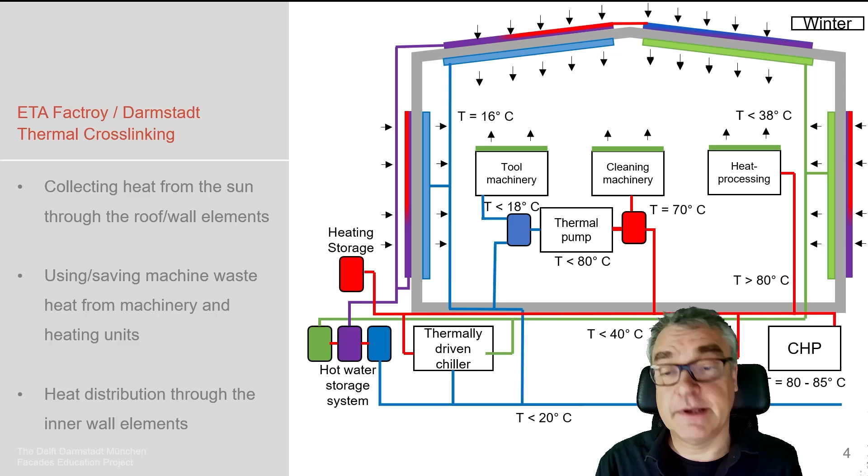Then using this energy and the waste energy from the machines, that whole thing is stored and then delivered to the inside in the case of need. And in summer, it works vice versa, which I like very much.

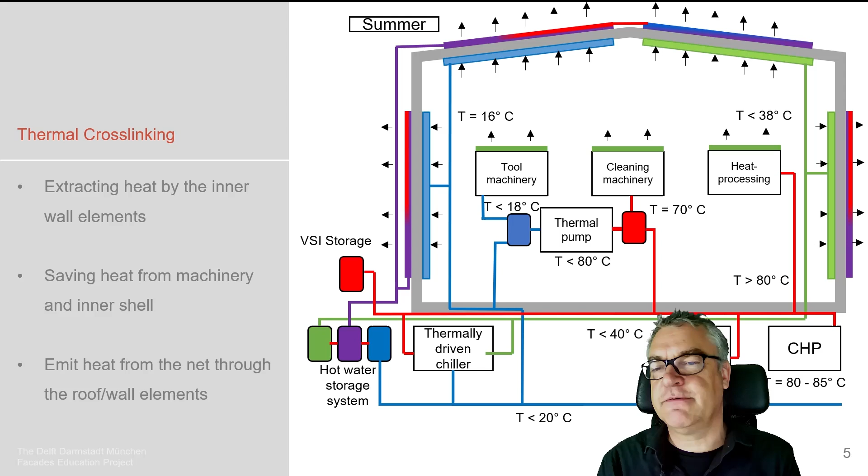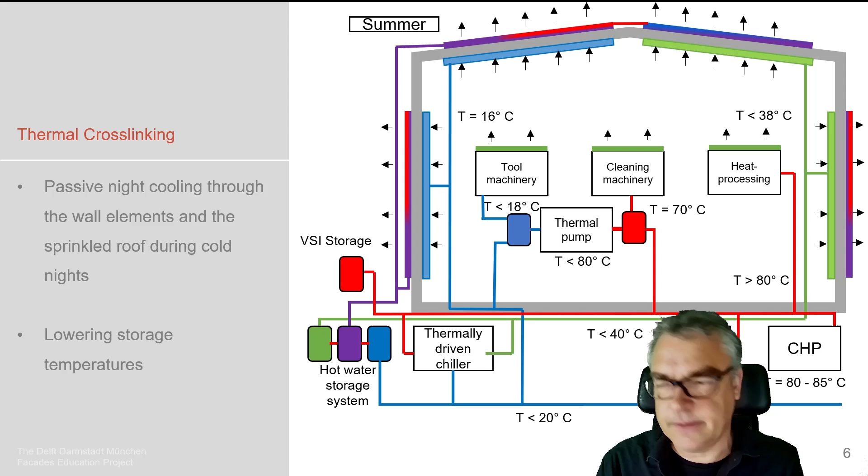So we have the energy from the machines at the inside, which is then absorbed by these collectors in the facade, then stored and then delivered at night to the outside to reduce the heat in the facade. So it actually cools and heats depending on the time of the year. This is how it is made.

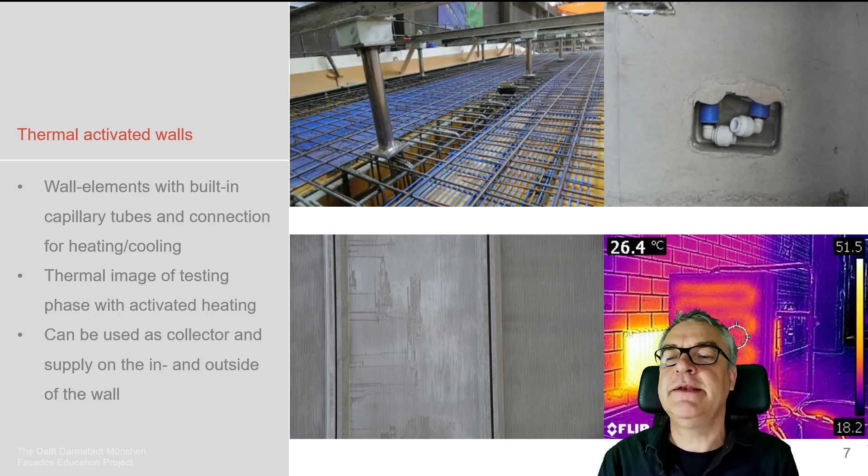It's concrete facades, inner and outer facade structures, which are having integrated these capillary pipes, which we see in there. That's the connection. These are the capillary pipe systems by drawing and in reality how they look.

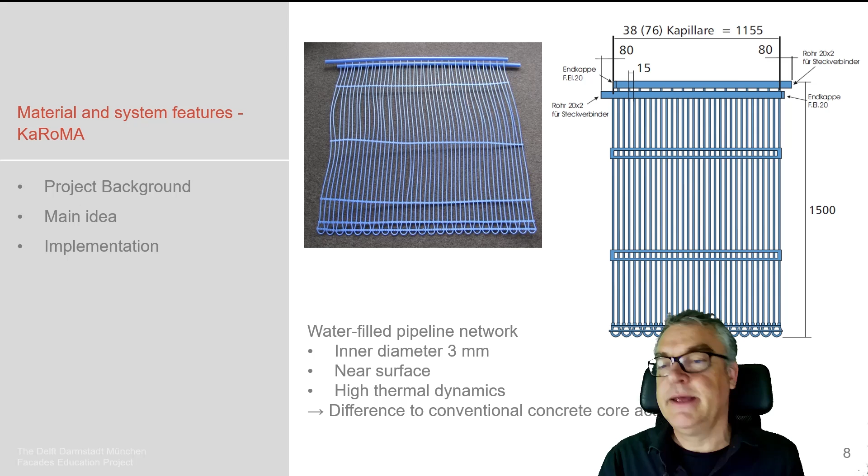It's an inner diameter of 2-3 millimeter polymer pipe system, which allows the water to penetrate the system, and by that being close to the concrete surface, being heated up by sun or heated up by indoor temperature, and then to be used and stored.

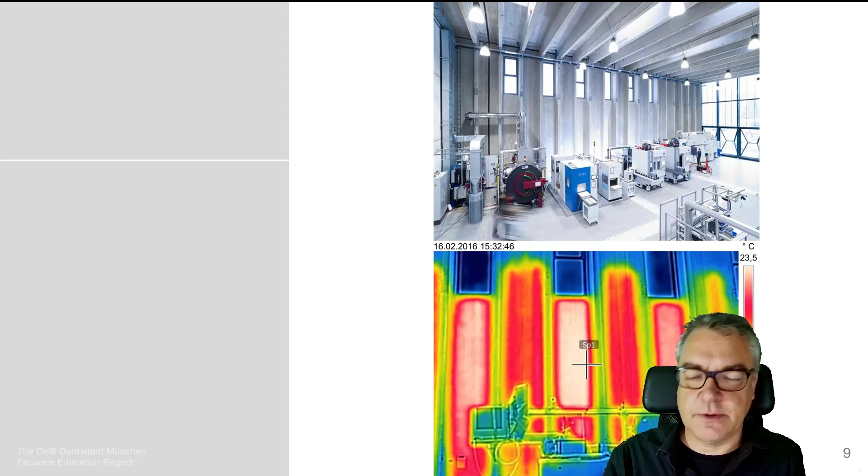This is how it looks from the inside, the building itself being finished, and here you see the transmission of the energy by these capillary pipes in the system. So integration of heating and cooling into the concrete surface.

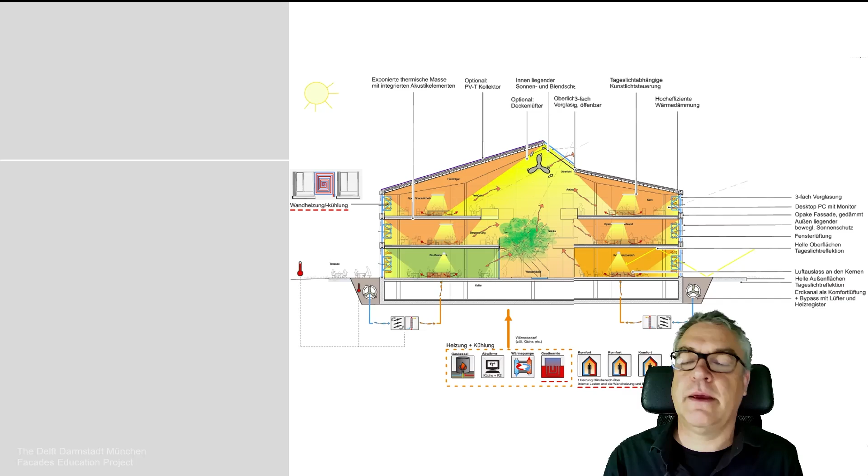Another sample which I like a lot is Alnatura in Darmstadt. Coincident that this is in Darmstadt as well. This is a huge office building in Darmstadt, being mainly built out of rammed earth. Here we see the rammed earth. Interestingly, prefab, but that's a different story.

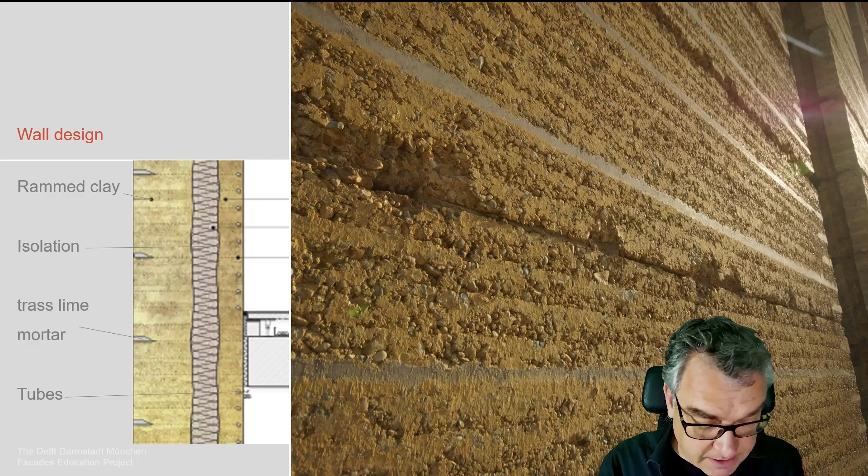And within this rammed earth, we see at the left side of the drawing, there's a piping system, the heating system being integrated into this rammed earth structure. Here we see the manufacturing of the rammed earth prefab units.

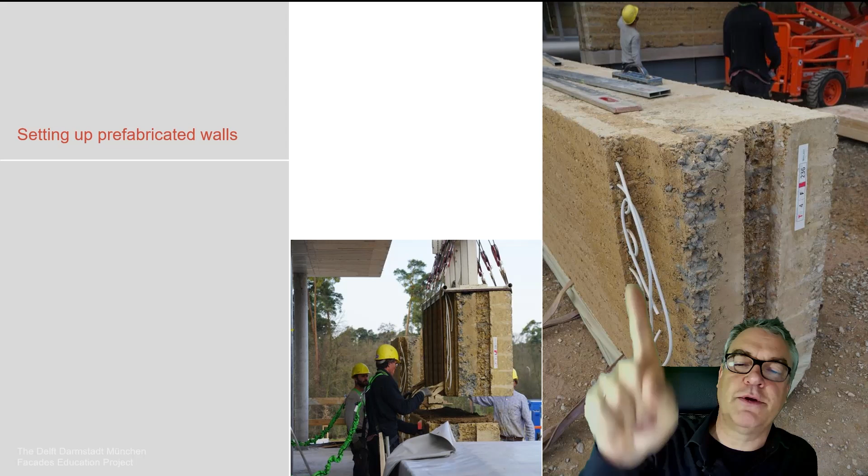We see the piping being already brought in position, then the prefab unit with all the piping being brought in position. Within this rammed earth prefab component, rammed earth being installed with the piping system at the inside, being connected to the main heating system of the building.

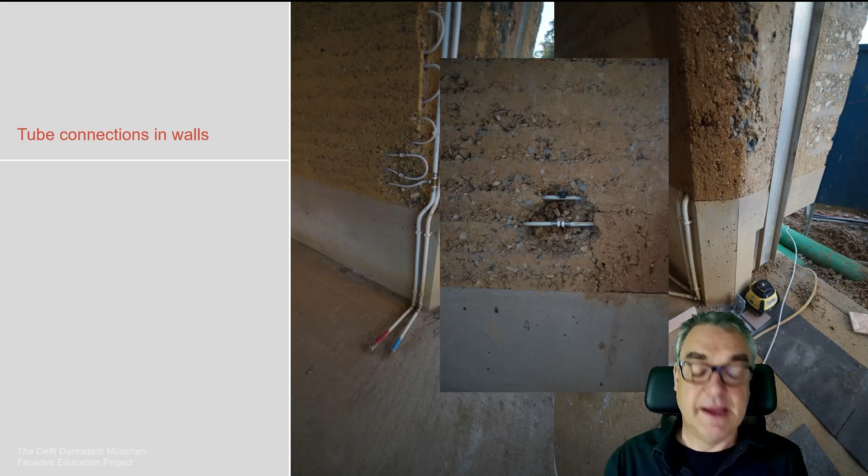In case of a leakage, I like it a lot. You just peel off the rammed earth, you fix it, and then you close it as a system. Integration of a heating system into a solid structure, in this case rammed earth as a setting. Alnatura as a project, just as samples of this aspect of facade integration of performance energy components.